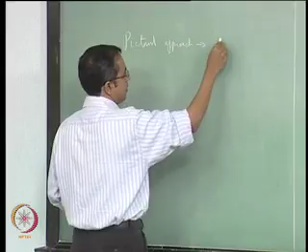We finished off by realizing that, based on our last two classes, we have a pictorial approach which gave us the band structure, and we also did the calculations using the wave equation, the Schrodinger wave equation, which also gave us the band structure, at least the band gaps.

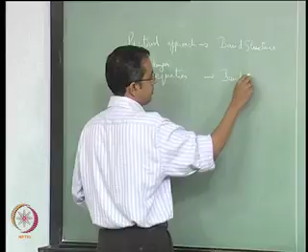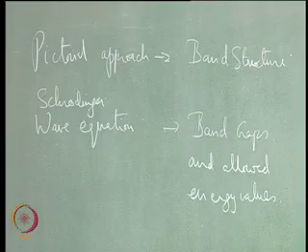I also pointed out that we have actually done this in a much more detailed way than you have perhaps ever been exposed to before, and in principle we had one diagram. The utility of it you have not yet completely seen. We will understand the utility of it a little later, maybe in the next class. In fact, we will look at it.

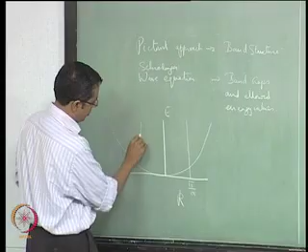So this was E, this was K, and we have the guideline which is the free electron parabola. We said that at the Brillouin zone boundaries—pi by a, minus pi by a, minus 2 pi by a, and 2 pi by a—at all these boundaries, this nearly free electron parabola, which itself is a set of discrete points, is distorted, and specifically we drew the distorted structure as something like this.

This is something like that. If you draw it to scale, this is how you will see it. Basically they will all finish up at the same values if you are looking at the same direction, and this then becomes the band.

So this is a band, and this lower end is also a band. I am just going to draw two bands here for the moment, and that will illustrate our purpose.

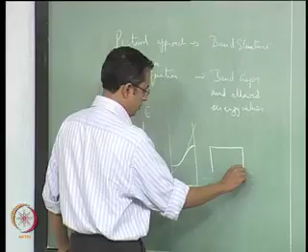So we have a representation for the band structure in the E versus K space, which has some detail here. The utility of this detail we have not really examined, and we will hold that off for one more class. Next class you will see the utility of this detail, which is what value of energy is permitted at which value of K. So this is E versus K diagram.

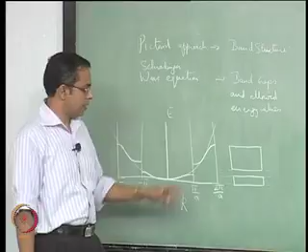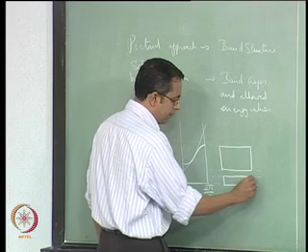We have actually also the same information, or an aspect of the same information, being represented to us here in the form of a flat band diagram. So here also, similarly you can have other bands. I have just drawn two bands here, obviously you can have bands above it, so to speak, and so we just have a series of energy levels here, and a series of energy levels here.

And exactly, these are all based on what is allowed in the system. Throughout this course, at various points I have pointed out that there is this concept of what is allowed in the system, and there is also this concept of what is actually being used in the system. So those are two separate things.

That is why we have the density of allowed states and the density of occupied states. So of those that are allowed, some up to some level is occupied. This is all allowed in the system, these are all allowed values in the system based on where the Fermi energy is, which is the highest value of electron energy in the system, which let us say arbitrarily I am setting here. If I set this as EF, then up to here everything is occupied.

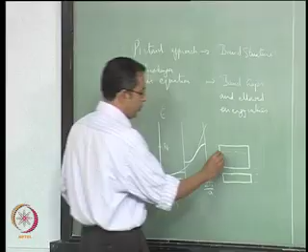All these energy values are occupied. So all these discrete energy values are occupied up to this Fermi energy EF. Above this you have vacant space, alright.

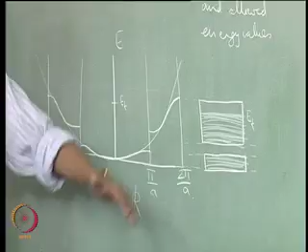So even with respect to today, we will focus a little more on this flat band structure, then we will come back to this structure here in the next class. In the flat band structure we can see that you can identify the allowed energy values, and you can also identify the level up to which those energy values are being used.

So on just this basis we can of course say something about the system, and what we conventionally say is that, you know, we can have, if you look at the last two bands as you go up in energy, some two bands, whichever are the highest energy level bands.

So then we have the following situation: we have something in the middle which is the band gap. These are the energy values that are not allowed. This is typically, if it is the last occupied band, fully occupied band, this is called the valence band. So this would be the valence band, and this empty band here would be the conduction band.

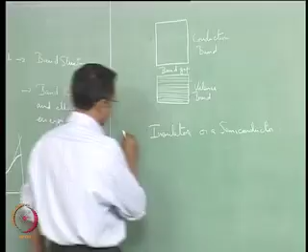So based on the layout of all these bands and what is being filled up, we have materials with different properties. For example, if you have this structure here where you have an empty conduction band and a filled valence band, then you either have an insulator or a semiconductor. So it is either an insulator or it is a semiconductor.

If you have a structure that looks something like this, whether or not it is actually an insulator or a semiconductor simply depends on the extent of this band gap. This band gap is typically denoted with E subscript g. So this is what we have there.

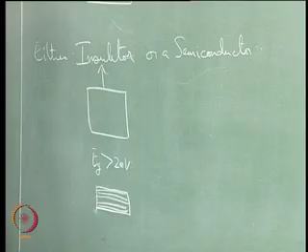So if you have Eg greater than 2 electron volts, if the band gap is greater than 2 electron volts, then it is an insulator. If on the other hand, these are all filled states, if we have Eg less than 2 electron volts, this is called a semiconductor. So greater than 2 electron volts is an insulator, less than 2 electron volts is a semiconductor.

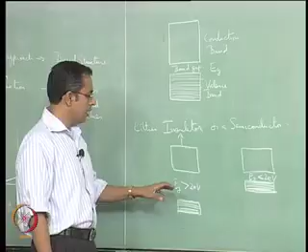So in that sense, what you see for a semiconductor and insulator, at least in concept, is the same. It's a matter of the value you see here, and the reason they are given the names they are is based on the fact that a band gap represents the amount of energy you have to provide to get electrons off the valence band into the conduction band. The larger the band gap, the more energy required for this transition, and only after that do you see any conductivity. If it crosses this threshold for typical purposes, the material tends to be very insulating, but if the value is less than 2 electron volts, the properties align more with what we call semiconductors. So that is how this nomenclature comes about.

So this is what is there for these two. For metallic systems, we actually have a couple of different possibilities that can occur.

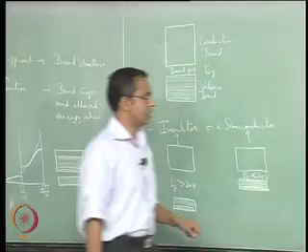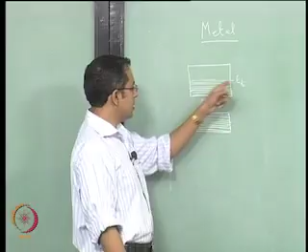We can have one situation where the last filled band is actually half filled. Here also, in a sense, there is a band gap, but it is not the band gap in the sense of a valence band versus a conduction band, so it's not a band gap in that sense. Further down in energy there are gaps, but we are more interested in what is happening at the Fermi energy level. This is the Fermi energy level, EF, the last occupied energy level for electrons at 0 Kelvin. We are interested in what happens here, as that often dictates the property of the material.

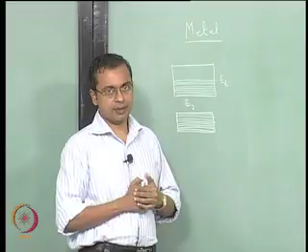For electrons to move through the system, the ease of movement depends on how easily they can locate energy levels immediately above them. Here there are energy values immediately above the Fermi energy which are all vacant. So if you give a slight amount of energy, the electron can get onto those levels and is then free to run around. That is how conduction occurs, and this becomes metallic - metallic meaning it conducts electricity very well. Also, one defining characteristic is the thermal coefficient of resistivity, which is positive - as you raise the temperature, the resistance goes up. That is what we see in this system.

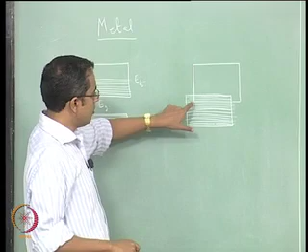The other way metals could have a band structure is if they have overlapping bands. Let me displace the bands so you can see them clearly. These are all filled levels and this is a vacant band. The only thing is that the bottom-most energy of that vacant band is less than the topmost energy of the filled band. Therefore electrons are able to easily get onto the other band and keep moving around. So this kind of overlapping band structure also enables the material to show metallic behavior - very good conduction with very little energy. This is the general layout of how these materials are.

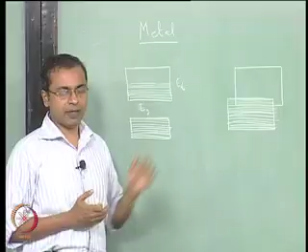I will also point out one other concept here. The Fermi energy for metallic systems has been defined the way we've seen and discussed in detail. However, there is a difference when you talk of semiconductors or insulators. Let me briefly show this in the schematic. By convention, for insulator or semiconducting materials - where you have a filled band, then a band gap, then a vacant band - halfway between the bands is where EF is. By convention, that is what the Fermi energy is.

Okay, so halfway between the bands is what the Fermi energy is. This is one case where the Fermi energy is actually at a location where there is a band gap. So in fact, when you say this is the Fermi energy, an electron can actually not sit at that energy. It is a forbidden energy for the system, but by convention that is what is chosen as the Fermi energy for semiconducting systems.

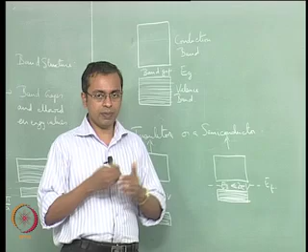The Fermi energy conveys to you what can or cannot be done in the system. These are all intrinsic semiconductors, which we will see in our next class. But when you dope this system, you are effectively raising or lowering the Fermi energy of the system. So that is effectively what you are doing. Okay, so this is the way in which it occurs.

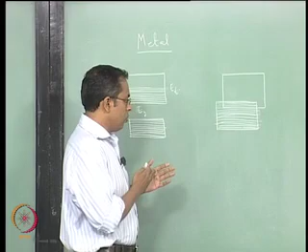We now see that there are a lot of different properties of materials that we can associate with the bands, and we have seen in the last few classes how bands arise. It is now of interest to look at a couple of things. We have tended to approach this entire problem of the band structure of materials from a certain perspective: that we had this set of atomic cores and this cloud of so-called free electrons running across the material. Our approach, the way we have done it, is in fact called the free electron approximation.

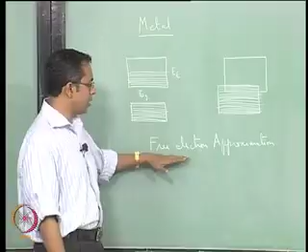So everything that we have done so far, all the theory that we have developed so far, represents this general approach referred to as the free electron approximation. The free electron approximation starts off with the position that you have free electrons in the system, and then gradually introduces all the details of the system, especially the periodic potential, into the picture. So that is how you get the free electron approximation.

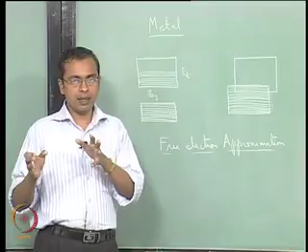Now effectively the same result can be obtained if you actually start at the other end of the picture, which is the opposite of the free electron approximation, wherein you are actually starting from a condition that the electrons are bound. Let me just explain here a little bit in greater detail.

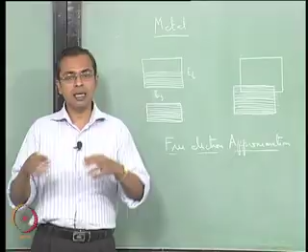We have already said that we have created a solid. So in this free electron approximation we already have a solid to start with. All the atoms are already in position. They have already released that one electron or two electrons or one point five electrons on average per atom, whatever it is that they are doing, into that free electron gas. That system, at that stage, is where we are analyzing the system. We take it at that moment where you already have the solid, and we do our analysis on the basis of what currently exists in that solid.

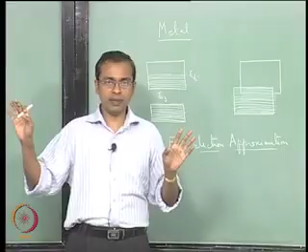The opposite approach is one where you do not actually have the solid to begin with. You say that you have actually only independent atoms to begin with. You bring the atoms together, and in the process of bringing the atoms together you build the solid. Whatever is happening as you build the solid, that is how you try to understand how the property of the solid has come about. You sort of know what the properties of each of the individual atoms are, and then you bring those atoms together, create the solid, and then try to understand why the solid is showing you a certain property. In that case, the electrons in that situation are originally all belonging to specific individual atoms.

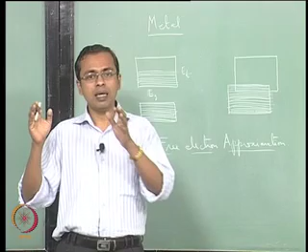In other words, they are bound to those atoms. So that approach, which is the opposite of the free electron approximation, starts from the position that you have an individual atom, though that individual atom has electrons at specific energy levels, and those are specific discrete energy levels, and those electrons are bound exclusively to that atom. You take such atoms and those electrons associated with each of those atoms, bring them together and create the solid. So the starting point there is that the electrons are bound tightly to each of those individual atoms, and therefore it is called the tight binding approximation.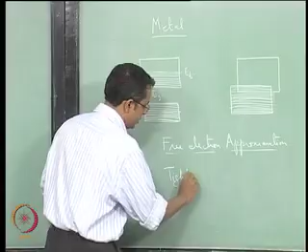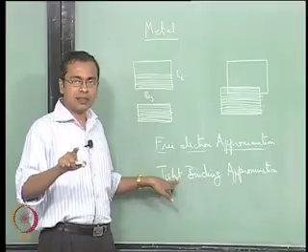You start from individual atoms where the electrons are tightly bound. The name can be slightly confusing because when you say tight binding approximation, you are actually starting with atoms that are not tightly bound, they are free atoms. The point is the electrons are tightly bound, that is the difference. So in this case the starting position is that the atoms are free, but the electrons are tightly bound to each of those atoms, that is why we call it tight binding approximation.

In this case, the electron itself shows up in the name, so it is clearly a free electron approximation. However, here the atoms are tightly bound in the sense that they are stuck to those lattice sites. So for the atoms the situation is the opposite of what it is for the electrons: here the electrons are free, the atoms are stuck; there the atoms are free, the electrons are stuck. That is the starting position.

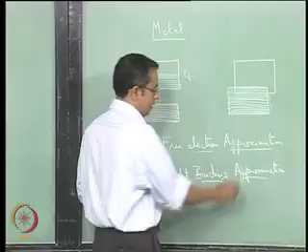That is how you build the solid. So we will briefly look at what this tight binding approximation says. Basically, if you take a given atom, you have electrons at specific energy levels associated with that atom.

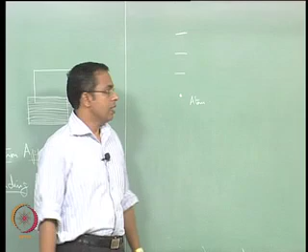Now if you take a solid, you have a huge number of these atoms, let us assume they are all atoms of the same kind. If you take a million such atoms, each one will have exactly the same energy levels for the electrons when they are separate. When laid out separately, the energy levels of those atoms will be exactly the same. That is in fact the characteristic of the atom, it shows you all those properties. So that is how these values are.

Now as you start bringing them together, we also have some sense that the inner shell electrons are closer to the core of the atom, and the outer shell electrons are a little further away. So when you bring the individual atoms, which are initially separated, closer and closer, the electrons at the outer shells begin to overlap, the electron clouds begin to overlap. If you push them even closer, then slowly shells below the outer shell also begin to overlap. So this kind of system occurs.

However, regardless of whether you start from independent atoms and bring them together, or start with a solid where the electrons are already running around, given the nature of electrons, we are forced to accept that they are subject to Pauli's exclusion principle.

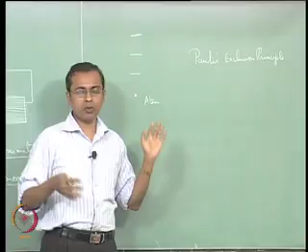In the free electron approximation, we implemented Pauli's exclusion principle using Fermi-Dirac statistics. Here, in the tight binding approximation, as the atoms get closer and closer, when a given energy level and therefore the shell of electrons begins to overlap, they are forced to split in energy. In other words, what was originally a single energy level will now split into enough energy levels above and below the original, such that it can still accommodate all the electrons.

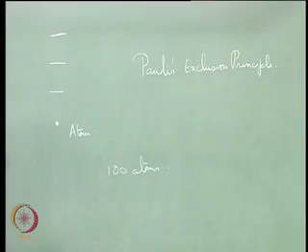For example, let us say I take 100 atoms and I start moving them closer and closer together. As they begin to overlap, as the outer shell electrons begin to overlap, this energy value, whatever it is, I will call it E1, E2, E3.

Let us say we have brought the atoms close enough that only the E3 energy value, and therefore that corresponding shell of electrons, is beginning to overlap. That E3 energy value will now split into 100 different energy values, since we have brought 100 atoms together and there are 100 electrons that need to be accommodated. Let us assume for the moment it is a single state, maybe with 1 electron per state. All of those original 100 electrons were at E3. Now they will split up and slowly spread into a wide range of energy values as the atoms get closer and closer, so that they can still accommodate all 100 electrons.

Okay, so assuming one electron per state, what was originally one state will now become 100 states, 100 energy levels. Around this value it will become a set of energy values around that energy value. This process is called the tight binding approximation.

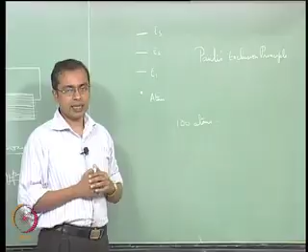We will draw this, energy as a function of something, and it really depends on how close you bring the atoms. If you take another atom here with the same energy values, what we actually see occurring will depend on the exact interatomic separation. As you bring the interatomic separation closer and closer, you will see the appropriate kind of splitting. That is what the tight binding approximation describes.

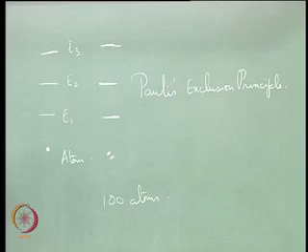So we will pictorially look at the tight binding approximation and see what we can expect. We will make a plot now of interatomic distance, interatomic separation - this is the average interatomic separation spread across all of those atoms. If we are looking at 100 atoms, that's what we are looking at, versus energy.

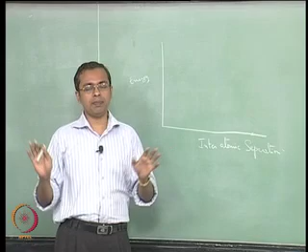Let us say initially the atoms are very far away from each other. When they are very far from each other, they are not really interacting with each other, so every atom has the energy levels corresponding to the original energy levels of that atom. Whatever are the energy levels of that individual atom, that is the energy level they have when you keep them widely separated, since at that point they are not really interacting. So we will just assume the same thing, E1, E2, E3, and E1, E2, E3.

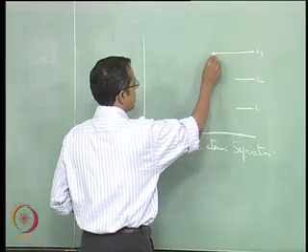As you bring them closer, what you will see - I will draw it here then describe it - is that at some point the outermost shell electron clouds begin to overlap, and at that point the energy levels are forced to split to accommodate all those electrons within energy values very close to that original energy value, but it cannot keep them at the same energy value because that would violate the Pauli exclusion principle. So therefore this begins to split like this.

You actually have a huge number of energy values here. Exactly how many energy values you have will depend on the number of atoms that you are pulling together, because that many electrons have to be accommodated, so that is how you get this. This is what is happening to the outermost shell.

If you take the next shell of electrons, which is at the next lower energy, they do not overlap at this point - only the outermost shell electrons have overlapped. You have to bring the atoms much closer before the next shell of electrons begins to overlap, but then the general trend of the behavior will look similar. You bring it much closer and you start seeing a similar kind of behavior, a series of energy values.

And for the lowest energy value that we are looking at, the same concept holds true. You have to go even deeper, bringing the atoms much closer before they begin to overlap, and so you start seeing a behavior that looks like that.

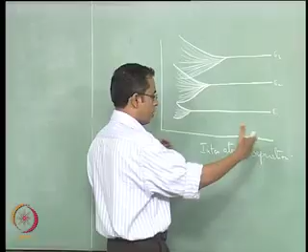So this is what we can expect if you take a set of atoms and start moving them together. We have now drawn what we can expect based on all possible interatomic separations that we can think of, which we can perhaps experimentally create or enforce on the system. Now, what is it that we actually have in the system? This is the general picture of what is possible.

Now we could have different interatomic separations. We can create a solid with a certain interatomic separation, or we may be able to create a solid with a different interatomic separation - we may be able to manipulate the interatomic separation.

Okay, so these are all things that we have at our disposal. So what we see is the band structure of the material, the band structure that eventually exists in a material that we probe, that we experience in the form of the property of the material. That band structure depends on whatever is the equilibrium spacing of the atoms in that material. So let us assume that one possible equilibrium spacing is here.

Corresponding to that we can draw a vertical line. Let's call this x1. So when equilibrium spacing is x1, we will see, let me draw it here at x1. We can draw it on this side so it will be clearer to see. At x1, this is E. We will see a single energy value corresponding to E1, we will also see a single energy value corresponding to E2, and we will see this band here.

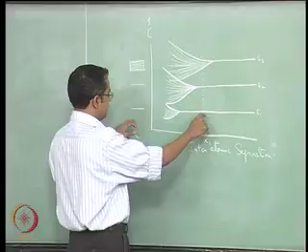So this is now how the flat band structure will evolve when you use the tight binding approximation. This picture comes from the tight binding approximation, and when you bring this picture together with the actual interatomic separation that exists in the material, you can understand how its band structure will evolve. At this interatomic separation, this energy level remains undisturbed at the original energy level, this energy level also remains undisturbed at the original energy level, and this energy level has split into a band of this width, because that corresponds to this x, and that width if you just draw here you get this. So you have a flat band representation of the band structure in a material using this tight binding approximation.

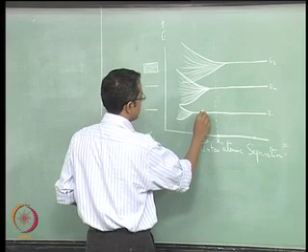This picture actually gives us further insight, because you can consider changing the interatomic spacing. For example, let's say we now have a new interatomic spacing which is here, so this is x2. What do we have at x2? We can again draw the line vertically up here, so we have x2. At x2 we will draw the band structure.

At x2, this energy value, E1, remains undisturbed, so it remains a single energy value as before. At x2, even this energy level E2 has split into a band, which is a relatively narrow band here. If you look at the band here, it is roughly something like this, that one and that one. So that band is already split, and the band above it has actually become wider.

So based on the interatomic spacing, this material can have different band structures. Simply based on the atoms, you can come up with this diagram regardless of the actual interatomic spacing, and then select a particular interatomic spacing to see what its band structure will be. So when it forms a certain crystal structure, based on the interatomic spacing you can predict how its band structure would have come about. You can see how one band would show up and another band would show up in this material.

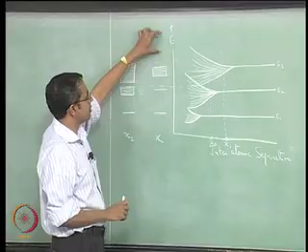Of course, we are assuming these are all only the available states, we have not indicated how much is filled and what is filled. Suppose for instance there is another band on top which is filled, or which is empty. We could have thought of another energy level E4, and that would have overlapped even faster, giving a set of empty energy levels here. Based on the separation between that band and this band, and similarly this band and that one, the separations are going to be different, closer here and further apart there. So this gap is going to be larger here and smaller here. Based on that separation, we could have this material being an insulator or a semiconductor.

So we see that as a function of interatomic separation we can use this tight binding approximation, and we can understand what might be happening in the material, how it could be changing its property. In fact, people essentially use this idea - you can actually change a semiconductor's semiconducting behavior, because in semiconductors manipulating the band gap is a very important thing. So this is a tool available to you to manipulate the band gap if you should choose to do so. This is one way in which you can do it.

Now the same idea we can look at in a slightly different angle. We are talking of interatomic separation here, so we can look at interatomic separation also as a function of pressure. When you strain a material, when you stretch it, you are raising the interatomic separation. As long as you are doing it elastically, you are marginally increasing the interatomic separation. Once you start plastically deforming it, that's different - entire sets of atoms are moving. When you put pressure on the material, you are compressing it, forcing the atoms into a smaller space, therefore reducing the interatomic separation.

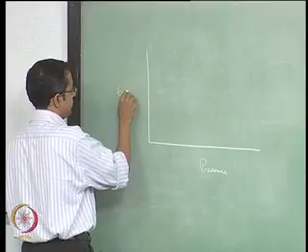So we will see what would happen if you increase the pressure that a material experiences, subjecting it to high pressures. So we will again look at energy - this is pressure, this is energy. We will say that this is a conduction band energy value. I will draw it and explain.

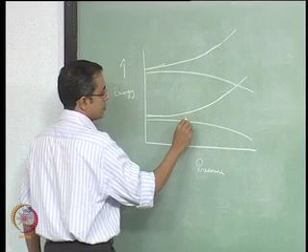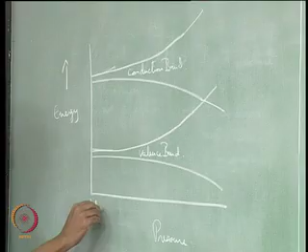Let's say this is the conduction band, with a certain energy band at some pressure - let's say this is atmospheric pressure, 1 atmosphere. So at 1 atmosphere pressure, you form this material at room temperature and atmospheric pressure. Under those conditions it has a certain band structure. The valence band exists over this range of energy values, the conduction band over that range, and halfway between them somewhere here is the Fermi energy EF.

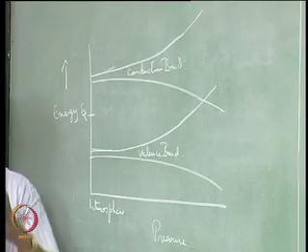So coming back here, this is the conduction band and this is the range of energy values over which it exists at atmospheric pressure. As you raise the pressure, slowly the conduction band begins to widen significantly. Similarly, the valence band - originally at 1 atmosphere this was its width - as you raise the pressure and bring the atoms closer, the valence band begins to expand in energy values. So what is actually happening is that the difference in energy between the highest energy of the valence band and the lowest energy of the conduction band, that is your band gap.

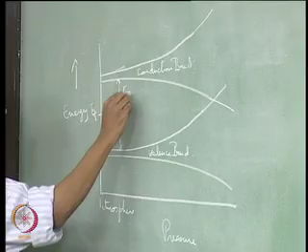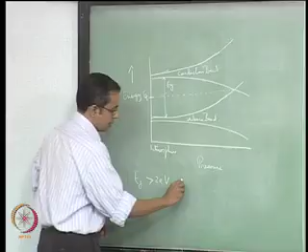So we have a band gap here. On this picture we see that as you raise the pressure, you are changing the band gap - whatever the initial value, it is steadily decreasing as you raise the pressure. So we will assume this is the Fermi energy. Our original definition still holds: if Eg is greater than 2 electron volts, it is an insulator, and if Eg is less than 2 electron volts, it is a semiconductor.

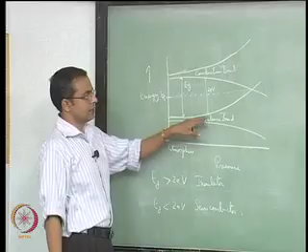So assuming we start with something that was an insulating material, up to some point, let's say here the Eg becomes 2 electron volts. That's an arbitrary designation - let me just say this is 2 electron volts. So we can now consider three situations.

For pressure up to here, as you raise the pressure that this material is subject to, up to this point this material behaves like an insulator. As you raise the pressure further and further, the band gap of the material now decreases to less than 2 electron volts.

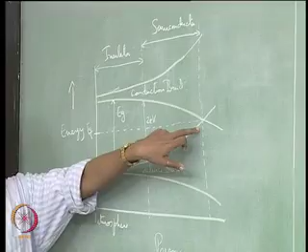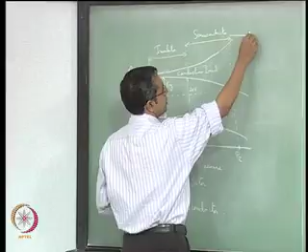So the material begins to behave like a semiconductor. If you now go in pressure past this point, which we'll call P2, what you see is that the bands now begin to overlap, the valence band begins to overlap with the conduction band. Therefore at pressures past this point, the material now begins to behave like a metal.

So we now see: Eg is greater than 2 electron volts, it is an insulator for P less than P1. Eg is less than 2 electron volts, it becomes a semiconductor, that is for pressures between P1 and P2. And then we have overlapping bands.

That implies it has become a metal, for P greater than P2. So when you go in pressure past P2, the same exact material, the atoms are all exactly the same, and we can assume even the crystal structure's symmetry has not changed, we have only changed the dimensions of the cell. So as you simply raise the pressure in the system, everything else being the same, the material moves from being an insulator to a semiconductor to a metal.

So what I wish to convey is that there is a lot of interesting information here. It means that when we test materials, we have to keep in mind that often we are testing materials at room temperature and atmospheric pressure. We can always test them under special conditions, but sometimes we forget that we are conducting a test at room temperature and atmospheric pressure, taking it for granted.

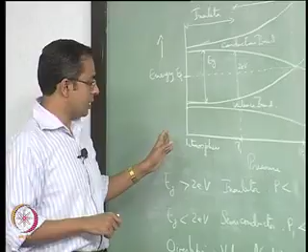If you go to other planets where the pressure is very high, then these things can change, material properties can change. So something that you may have made a circuit assuming is going to be a semiconductor, if you send it to some location where the pressure is very high, it may actually become metallic and therefore your circuit might fail. So this is something you have to be more aware of, that the property can change very dramatically as a result of pressure.

That said, I also want to point out that in general the sensitivity to pressure is rather poor. Even though this picture shows you what can happen with pressure, what is not really conveyed is, given that this is 1 atmosphere, what is P1 and what is P2. So the actual values are not really indicated here.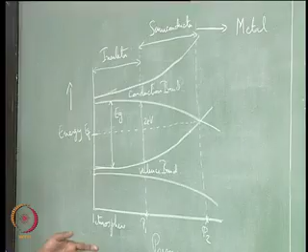So just to give you an example of the scale we are looking at: hydrogen, which we think of traditionally as a gas, or to some degree as liquid hydrogen for storage purposes, but that is conventionally all we are looking at. But if you actually put enough pressure on it, it can become a solid. And if you keep raising the pressure on this hydrogen solid, you can reach a point where hydrogen becomes metallic. So this is possible, or at least theoretically predicted and expected to happen.

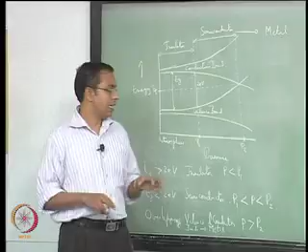So this is a possibility, but the kind of pressure you are talking of is in the millions of bars, of the order of a megabar. A bar is 1 atmospheric pressure, so if you are talking of a megabar, you are talking of a million atmospheres. That is not something you are going to generate that easily, so that is what I mean by saying the sensitivity to pressure is rather low.

Many materials are much more sensitive to temperature than they are to pressure, typically, and certainly this is true with solid systems. For gases that is different, but for solid systems, when you analyze them, you will find that the sensitivity of their properties to temperature is much higher than the sensitivity to pressure. But it is worth keeping in mind that properties can change with pressure, and that is what is being conveyed here. In particular, the electronic properties are shown, so you understand that you can go from an insulator to a semiconductor to a metal simply by changing the pressure experienced by a component.

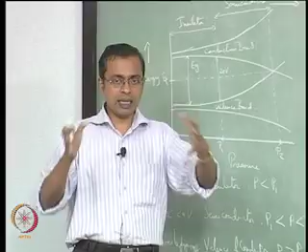So this is what we have looked at today: we have kept in mind that much of the discussion so far has been based on the free electron approximation, which basically starts with the assumption that you already have free electrons in the system. The electrons are already there in that atmosphere, and we are looking at those free electrons - first ignoring the impact of the periodic potential in the lattice, and later introducing the periodic potential of the lattice into the system to understand the properties.

Today what we have looked at is the fact that if you take separate atoms and understand the description of those separate atoms independently, and then move those atoms together, in that process also you can try to predict what the properties of that solid are going to be when you start from independent atoms and push them together. So in this process also you can create the same kind of understanding of the material, and that is called the tight binding approximation.

In principle, both approaches, whether free electron approximation or tight binding approximation, are essentially trying to explain the same things. At the end of the day, for a given material, both approaches should give you a reasonably good prediction of the property of the material. So that is one thing to be said about both approaches.

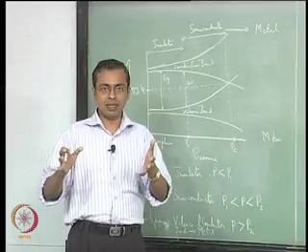However, given that a metal has this general structure of an ionic core and a free electron gas, that picture fits a metal pretty well. So the free electron approximation is much more relevant and likely to give a good prediction for metallic systems, simply because its starting point is very close to what a metal already is. So that is a good starting point for a metal.

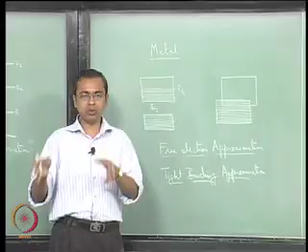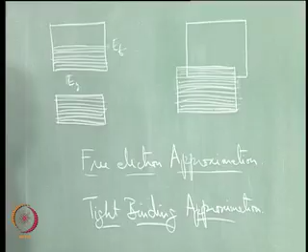Therefore the free electron approximation is generally what is looked at in greater detail for metallic systems, which is a very large part of the periodic table, and that is why we have spent so much time on it. Generally for semiconductors and insulators, the tight binding approximation tends to give the right kind of analysis more easily. So for semiconductors and insulators, tight binding approximation is the more appropriate approach. For metallic systems, the free electron approximation is the better approach. This is how these approaches compare with each other.

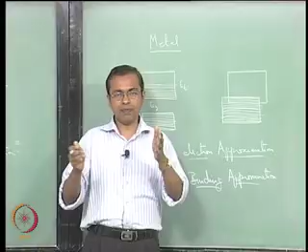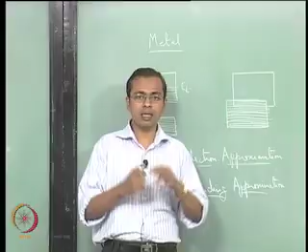I will conclude by pointing out one more aspect we have not touched upon: regardless of which approach you take, we have seen that the band structure, in the free electron approximation, involves Brillouin zones, and the band structure evolves based on the interaction of k vectors with the Brillouin zones. The important thing is that the location of the Brillouin zones is at different places based on the direction you are looking at. We saw some polygonal shape appear based on the system, so Brillouin zones can appear at different distances from the origin depending on direction.

Therefore, the k vector and its interaction with the Brillouin zone can occur at different locations, which means that based on the direction you look in the material, the property can change, because the definition of the allowed energy level, whether there is overlap or not, changes based on direction, since the Brillouin zone appears at different positions within the structure.

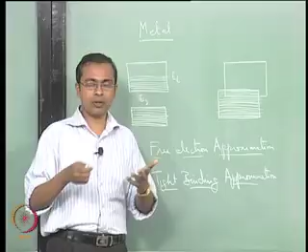Similarly, in the tight binding approximation, it only talks of interatomic spacing, not direction. So depending on the direction you go, you can again see variation in properties. Therefore both approaches can convey that anisotropy can exist in a material. Our earlier models could not show anisotropy because we assumed a uniform number of free electrons per unit volume, but these approaches can show anisotropy.

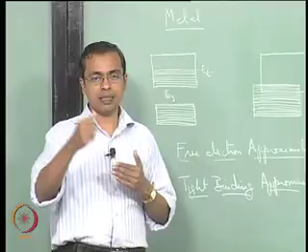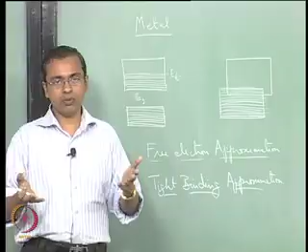Certainly in the free electron approach, when you account for the Brillouin zone being at different positions based on the structure, its interaction with the Fermi surface can occur at different locations, and therefore properties can change. So we have seen where one approach is better and where the other is better, and we see that regardless of approach, ultimately it is the same material being discussed, so to the extent they are valid, they should predict properties appropriately.